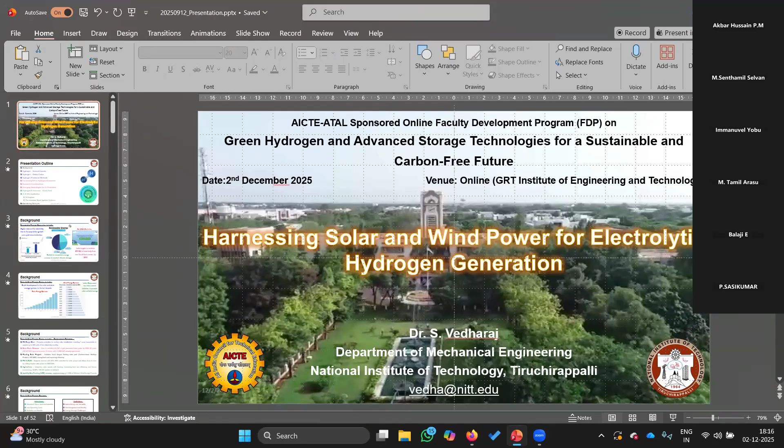So let me share the screen and I'll just start. So things are visible? Oh, yes, sir. Visible, sir. Fine. Shall I start now? Yes, sir. Please continue, sir. And if there is any technical glitch or you're not able to see the slide movement or audio issues, just let me know. Okay, sir. Right. Thanks. So good evening to one and all.

Today I've been given a topic on harnessing solar and wind power for electrolytic hydrogen generation, for this wonderful online faculty development program on green hydrogen and advanced storage technologies for a sustainable carbon-free future. As sir has introduced, I've been an engine researcher for the past 15 years. For the last 5 or 6 years, I've started working on hydrogen fuels, so we are developing hydrogen combustion systems. And in the last 1 or 2 years, I'm also getting into hydrogen generation because the world is moving towards hydrogen technologies and the hydrogen economy.

So the basic outline of today's presentation. First we'll start with the background: what is the status of the renewable energy sector in India? I'll also walk you through the current facts and the government schemes that have been introduced to promote renewable energy, what the setbacks of renewable energy systems are, and how hydrogen can bridge those setbacks. Then we'll see the general aspects of hydrogen and the different color codes adopted for hydrogen systems.

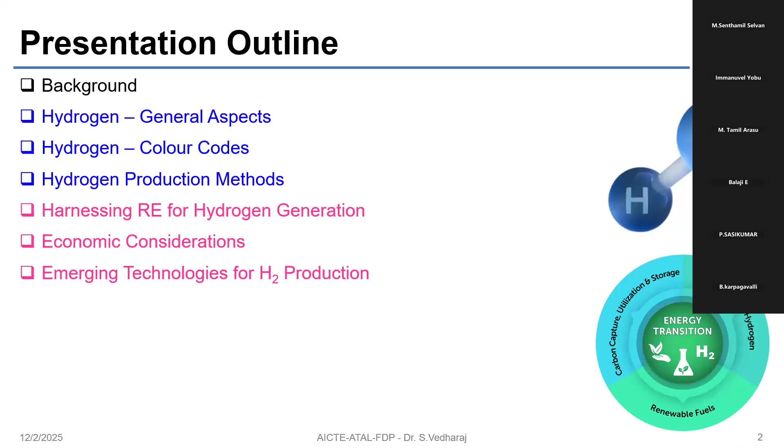So what are the emerging technologies that are in current research that will foster hydrogen production? That I'll also touch upon. And finally, how it is being used in end applications - hydrogen used in different ways.

As my expertise is with combustion, I will give you a brief about how hydrogen can be adopted for different engine concepts, and majorly herein I work with pre-chamber systems. So what do you mean by a pre-chamber system and how it can be incorporated - I'll give a brief about that, and finally the concluding remarks.

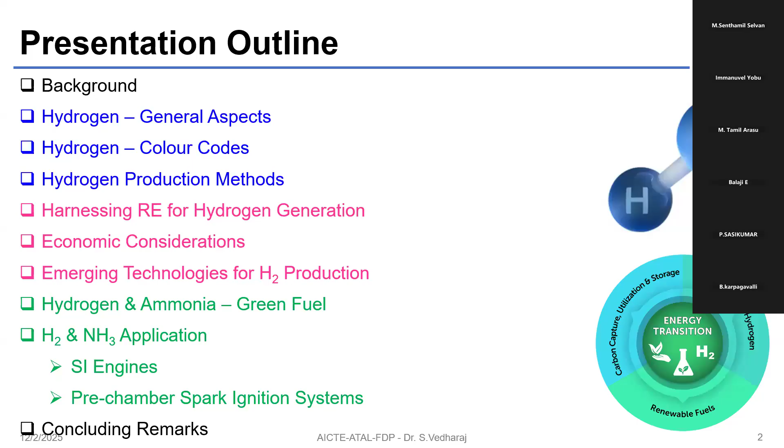In recent times, there is a rapid increase in electricity demand, majorly due to population growth as well as rapid industrialization. If we look into statistical data from the Ministry of Power over the last decade - in March 2014, the total electricity generation installed capacity was only about 250 gigawatts. Now it is almost doubled. Going forward there will be a huge demand due to industrialization and all the sophisticated instruments and other things we are procuring.

Everything relies on electricity, and the government is pushing away from conventional thermal power plants or coal power plant systems. What are the major things coming up in the renewable sector? The government is pushing towards renewable energy to combat climate change.

According to October 2024 statistics, we have crossed 200 gigawatts of renewable energy capacity in India. The government has made a clear promise to achieve 500 gigawatts of energy by the year 2030. If you look at the renewable energy capacity in India, the major contributors are solar, wind, and hydro, while biopower and small hydro are very small percentages.

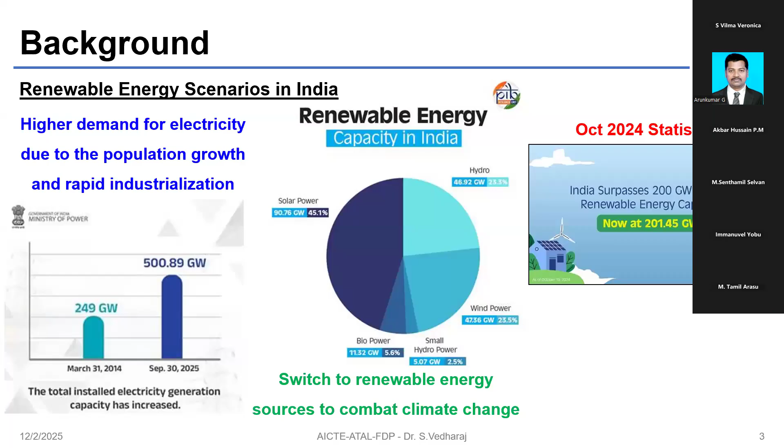Solar power contributes nearly 45% of the total renewable energy capacity, and wind is the second one, contributing nearly 23.5% of the total renewable energy capacity. So as I said, India targets 500 gigawatts of electricity exclusively from renewable energy by 2030 - that's the target they have set.

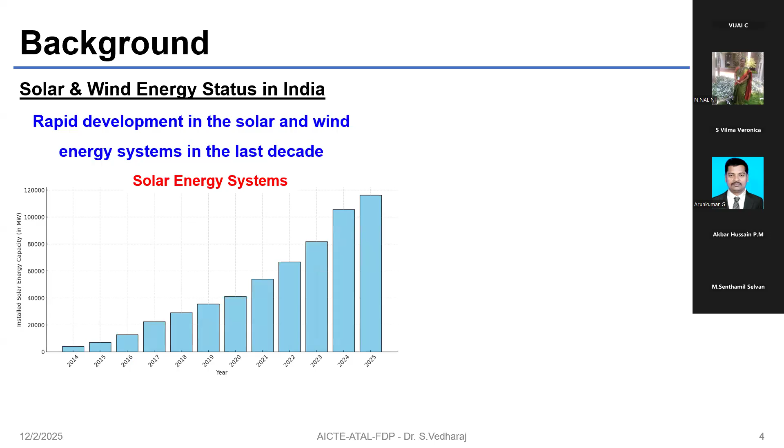If we individually look into the developments of solar and wind, the last decade shows drastic or rapid development in both sectors. In the year 2014, the total installed solar energy capacity was roughly less than 10 gigawatts. Now we are at about 110 gigawatts, which means it's kind of an 11-fold increase.

As India, we are geographically favorable for solar energy extraction - we lie in the Tropic of Cancer, and for about 300 days out of 365 days in the year we get solar energy. The government has taken initiatives to push solar energy systems to greater heights.

When it comes to wind energy systems, the capacity is slowly increasing. Compared to 2014 and 2024, the total wind energy system capacity has almost doubled. Similar to solar, we also have very large coastal lines, and because of this, wind energy accumulation is higher - a favorable situation for extracting renewable wind energy. Majorly, people focus on coastal regions near Tamil Nadu, or on Gujarat, where wind velocity or wind energy availability is higher.

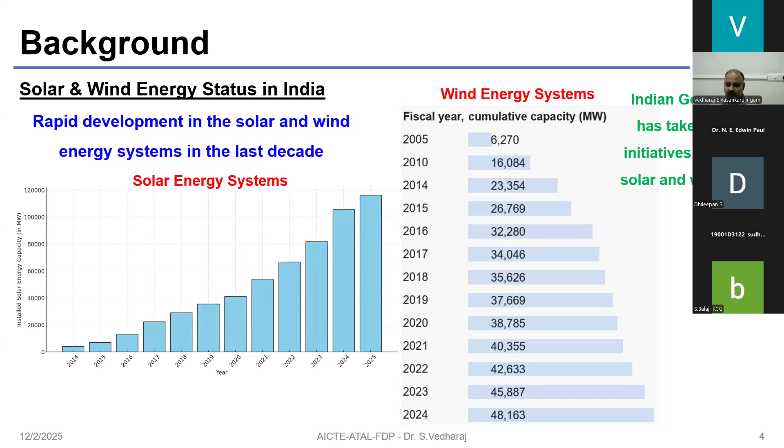In recent times, the government has taken several initiatives to promote both the solar and wind energy sectors. So I'll brief you about the different schemes that have been developed in recent times.

First is PM Surya Ghar - the Prime Minister introduced this in the year 2024 with a vision of enabling rooftop solar installation for nearly 1 crore households. It provides subsidy for installing solar installations, as well as 300 units of free electricity on a monthly basis. Within a year's time, I think they have achieved nearly 10 lakh installations, which has been in the news articles recently. This is a very huge step by the Indian government.

So they have planned to introduce the solar park scheme.

With the established capacity of nearly 40 gigawatts of solar energy by 2026, they have planned to go with 53 different parks across 13 different states, and currently nearly 14 gigawatts is already operational. Rajasthan's Bhadla solar park is the largest one, with a capacity of about 2.25 gigawatts in a single place, spread across a large area.

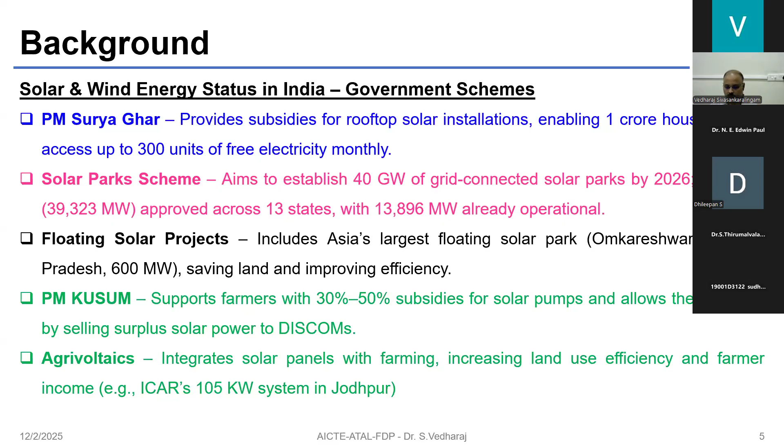The final one is a viability gap funding scheme. This is the only scheme introduced to promote offshore wind energy projects. We all know offshore wind energy is quite costlier compared to onshore wind energy projects, and the government wants to explore the capacity of wind available in offshore conditions. They plan for the implementation of 1 gigawatt of capacity: 500 megawatts is planned in Tamil Nadu coastal regions, and 500 megawatts of installation is planned in the shores of Gujarat as well.

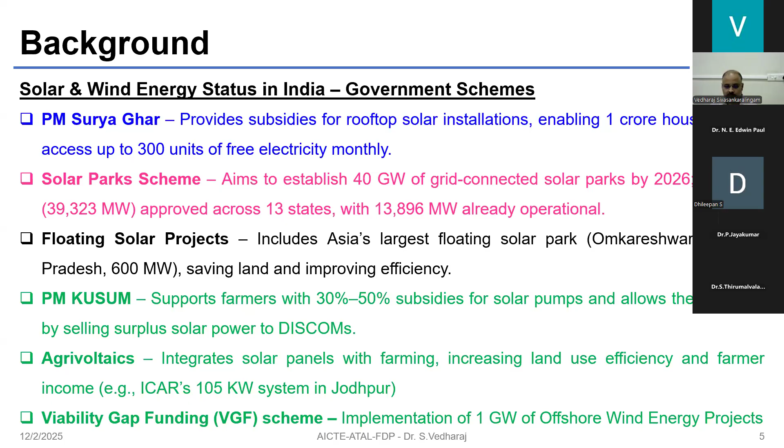We have been through this solar and wind energy system for quite a long time, and I want to summarize the key advantages and limitations of the systems, and how hydrogen can bridge these limitations. Solar and wind are abundantly available, inexhaustible, renewable, and clean energy. When it comes to operating cost, it is lower, because once you install these solar plants or wind farms, they have a lifespan of nearly 25 to 30 years, and maintenance cost is also quite low. That is one of the advantages.

The second thing is you can scale it to different levels - you can have very miniature systems as well as very large wind farms and solar systems, with rooftop installations as well as large parks. Nowadays with wind energy also, they have generated bladeless turbines and started installing them on highways to extract wind energy. So it is kind of flexible - you can go with either a small scale system or a large scale system.

We all know that the environmental impact it creates is very minimal - no air pollution, no water is being involved, so it's kind of advantageous. One major thing is it provides energy security. In 2022, when the Russia-Ukraine war started, Russia stopped its natural gas supply to European nations, and there was a huge demand for natural gas at that time. European nations felt the necessity of energy security by that time. From that period onward, every country is keen on developing energy security policy so they want to have their own energy resources, and India also is keen on these schemes.

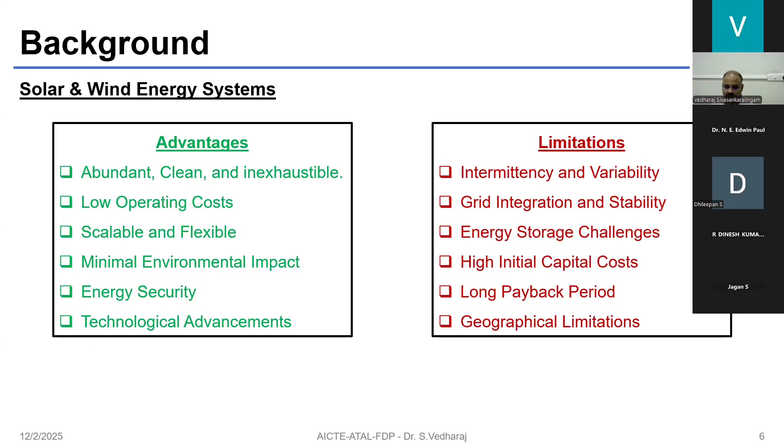So now how can these limitations of solar and wind energy be addressed with hydrogen technologies? One is the intermittent nature of solar and wind - instead of using a battery pack to store the produced energy, we can use that renewable energy to produce hydrogen whenever we have excess renewable energy. So during high solar or high wind output, and whenever generation is low, the hydrogen can be utilized in applications like fuel cells or other systems to provide back the energy. You store it during high production and give it back during low generation.

For energy storage limitations, you can store hydrogen as compressed gas, or you can liquefy hydrogen as well. It provides long-term energy storage solutions. Batteries have a limited capacity and are suited for short-term storage, but with hydrogen, you can go with long-term storage solutions as well.

For grid stability, hydrogen stores the energy during higher output and provides it back whenever generation is low. It just tries to smoothen out the fluctuations in renewable energy operations.

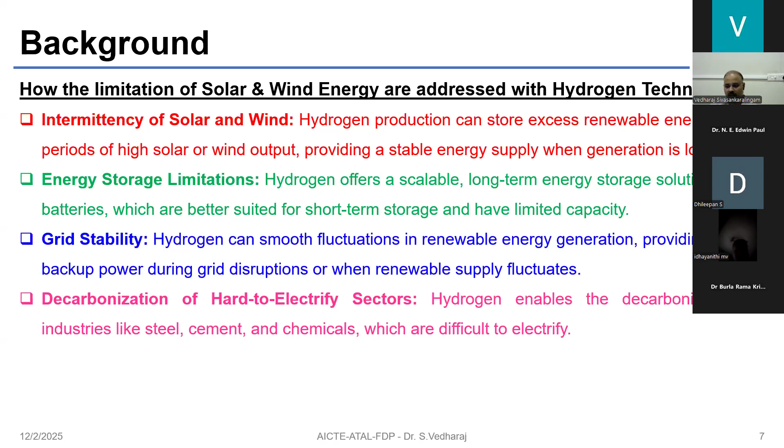When we go with concentrated solar power, we try to extract heat energy from the sun and target it towards a receiver, where you get higher temperatures, and allow a Rankine cycle to follow - using liquids to absorb the heat, which gets vaporized and expands in a turbine, and that turbine is linked to a generator to generate electricity. The electricity generated here is AC electricity.

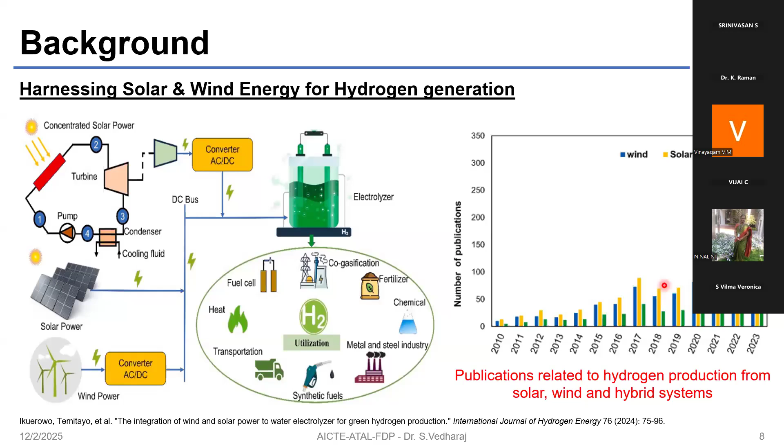And in recent times, you can see the number of publications on hydrogen production from solar, wind, or the hybrid system has increased a lot, right? So the statistics says that it follows an exponential trend; it denotes the people's interest towards having renewable energy for hydrogen generation.

So the general aspects of hydrogen. Hydrogen is the most abundant element in the universe; if you take the sun, you have majorly hydrogen and helium. But when we talk about Earth, it never exists in its molecular form of H2, right? Rather, it exists in compound form with other elements, like hydrocarbons or ammonia. Hydrogen as a pure one doesn't exist on Earth.

And it's an invisible, colorless, and odorless gas. It has the highest energy density on a mass basis, whereas on a volume basis it has the lowest energy density, right? And it has unique characteristics. It can be stored as a gas, compressed gas, as a liquid, or in certain applications as solid metal hydrides. So these unique characteristics make it ideal for energy carrier scenarios.

And nearly 95% of the hydrogen produced till date is majorly by the steam methane reforming process. The trend of electrolysis, due to the higher cost involved, is slowly taking up. But nearly 95% of the hydrogen produced is from the steam methane reforming process.

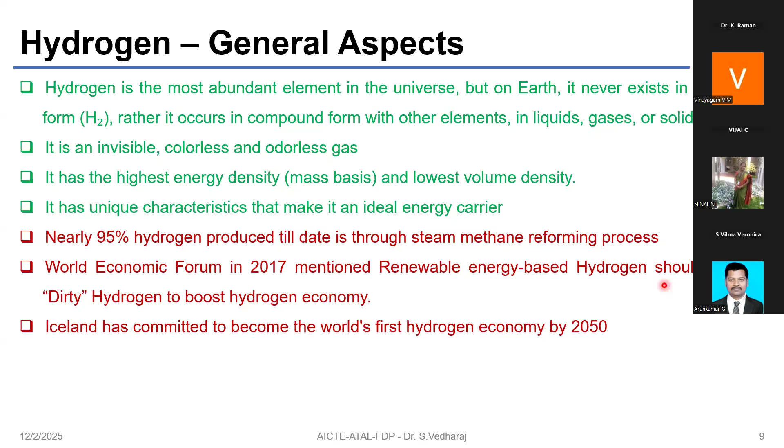And based upon that, Iceland has committed to become the world's first hydrogen economy by 2050. Hydrogen economy means it relies only on hydrogen for all its energy needs, right? The major reason is Iceland has higher geothermal energy, so dissociating water and producing hydrogen from the geothermal source is quite feasible. That's why they went with this treaty.

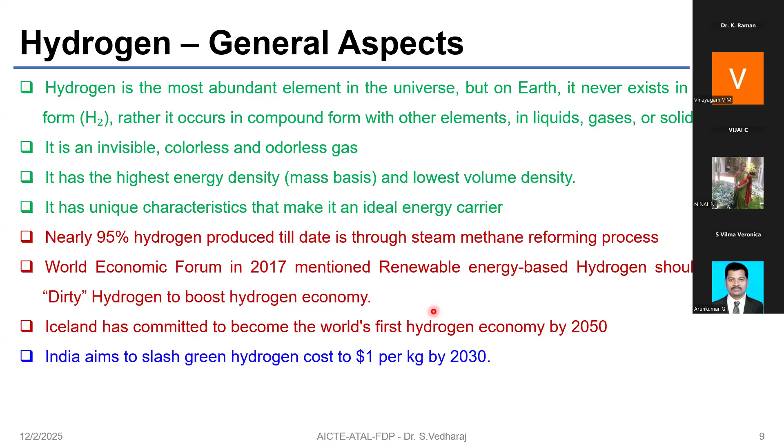And in India, the cost of hydrogen production is currently roughly around $3 to $4 per kg, and they want to slash it down to $1 per kg by 2030. India started the green hydrogen mission, wherein the government has set an ambitious target of nearly 5 million metric tons of green hydrogen production by 2030. It's a huge target, and many companies have started working towards that, and we'll see the scenario of hydrogen production in India as well.

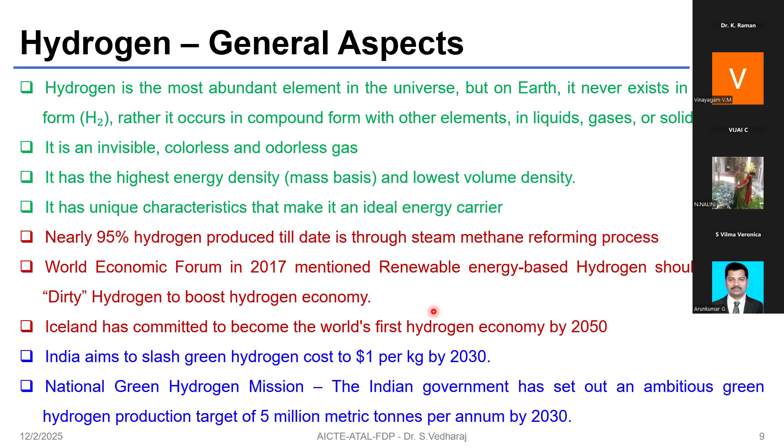I think most of you have heard about the different color codes of hydrogen, right? The traditional processes we classify as gray, black, and brown. Gray is when we use the well-known steam methane reforming process and don't capture any emissions. Black hydrogen uses coal gasification with anthracite coal. If you use lignite or brown coal, it's called brown hydrogen. These are the traditional methods for producing hydrogen.

And now people have come up with different colors, right? Blue hydrogen is the same steam methane reforming process, with one difference: you capture the carbon emission coming out of the process and sequester it and use it for different applications. Whenever you capture the emissions and store them for different usage, it is called blue hydrogen.

Then turquoise hydrogen is dissociating the methane molecule into hydrogen and solid carbon, so that nothing is left out into the atmosphere as gases. So you can use the solid carbon for different processes.

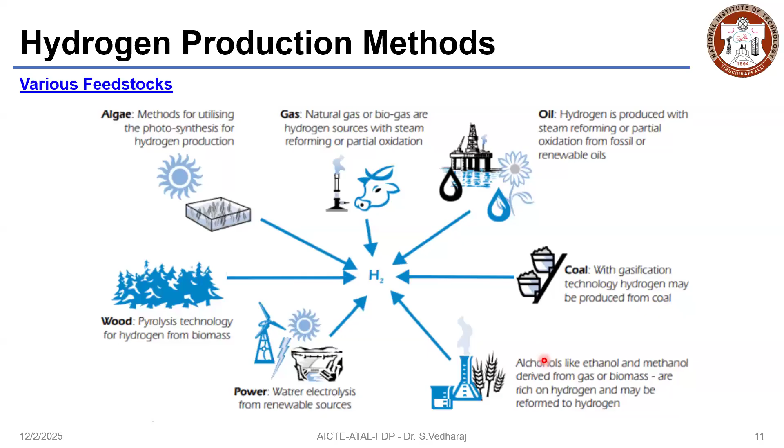They categorize the processes into electrochemical, thermochemical, and photochemical processes. So we have different resources. In the electrochemical electrolysis process, we use water as a feedstock, take electricity from either non-renewable or renewable resources, and dissociate the water. In thermochemical processes, we provide thermal energy to dissociate it to form hydrogen, using natural gas, coal, liquid fuels, biomass, carbonaceous material, and so on.

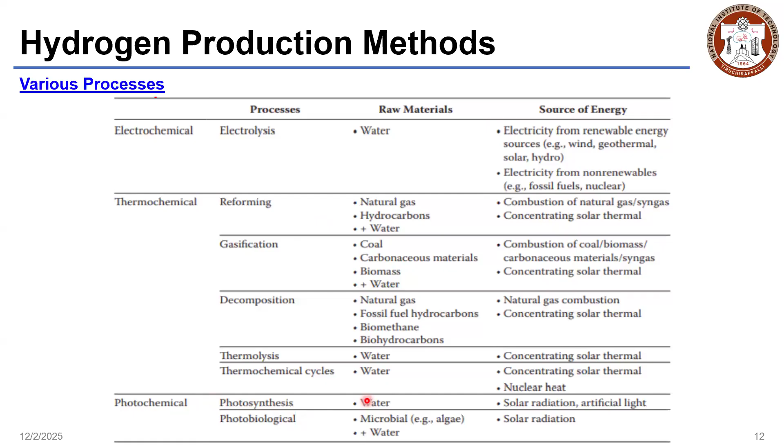Photochemical uses photo radiation, solar radiation, and the light source may excite the electrons and dissociate the water as well. So when we talk about green hydrogen, water splitting is one of the major things. You have three different scenarios: thermolysis, photolysis, and electrolysis. Thermolysis, as I said, you heat it up to very high temperatures and break it down to simpler compounds.

Water thermolysis usually happens at a temperature of more than 2500 degrees centigrade. You can also go for hydrocarbon thermolysis, kind of methane cracking, wherein we produce turquoise hydrogen, at roughly 1000 to 1200 degrees centigrade. In photolysis, the photons from the sun's energy are used to split the water. You have two scenarios: photochemical or photoelectrochemical. You can adopt both to dissociate the water.

And the main thing is electrolysis. We use electric current to split the water into hydrogen and oxygen. There are four different types, and the alkaline water electrolyzer is the most well-known one. Proton exchange membrane is also a known technology wherein we can generate hydrogen with higher purity.

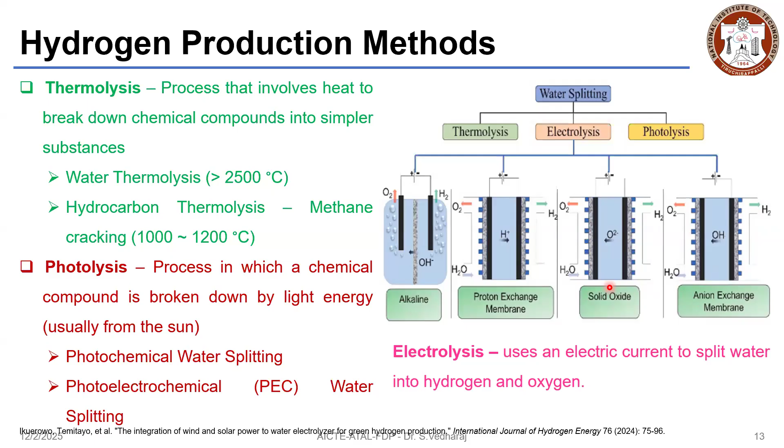Solid oxide electrolyzers as well as anion exchange membrane electrolyzers are evolving technologies, right? For solid oxide, in recent times there are a number of scenarios where they try to use steam instead of water to electrolyze it to form hydrogen. We'll see the working of each in the coming slides. So first is alkaline water electrolyzers.

It uses a concentrated alkaline electrolyte, either potassium hydroxide or sodium hydroxide, roughly about 5 M in the water, roughly 30 or 40% of the solution. The anode and cathode are separated by a diaphragm. The diaphragm allows the OH hydroxyl ions to flow, whereas it prevents the gases generated at the anode and cathode from mixing.

Whenever DC electricity is applied to this electrolyzer, at the cathode water reacts to produce hydrogen gas, and it also produces hydroxyl ions. These hydroxyl ions are transported through the diaphragm and reach the anode. At the anode, the OH ions liberate their excess electrons and produce water and oxygen gas.

So this technology is mature and it's a low cost hydrogen generation technology, and it has a longer lifetime. And the catalyst that is being employed in this alkaline water electrolyzer is non-precious metals. The major problem with this alkaline water electrolyzer is its slow response time. And because of its slow response time, it is not ideal for the fluctuating nature of renewable power.

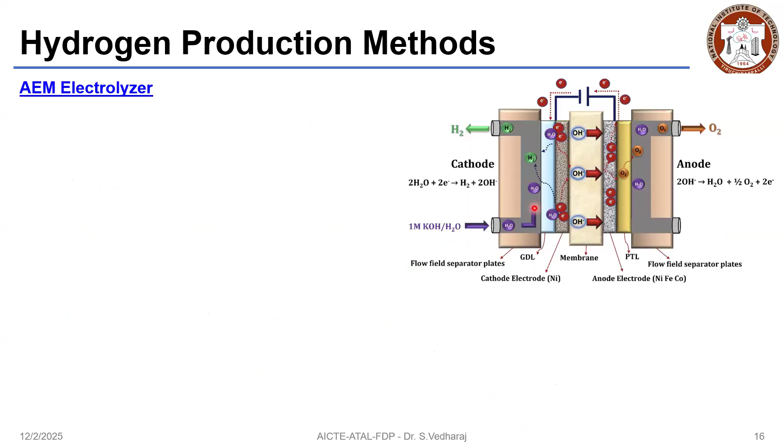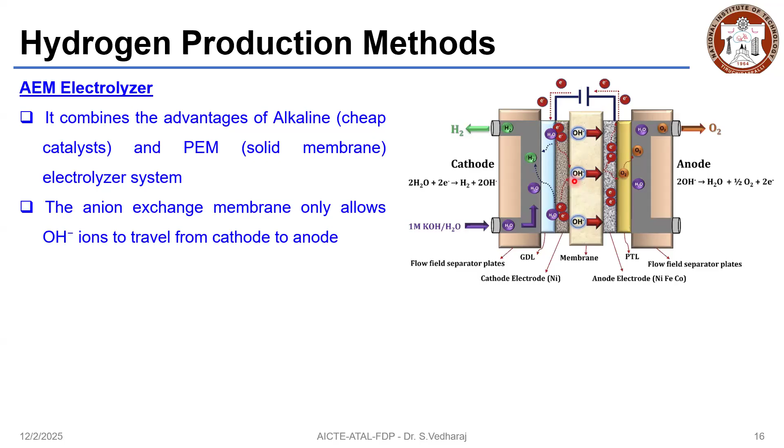So next is the anion exchange membrane electrolyzer. It combines the advantages of both the alkaline, that is the cheap catalyst, with the proton exchange membrane electrolyzer systems. And here the anion exchange membrane that we use between the cathode and anode allows only the OH ions to be transported from the cathode to anode, and it doesn't allow the gases that are formed to flow through as well, similar to the others, right?

And here the water is reduced to hydrogen in the cathode, and it produces hydroxyl ions. The hydroxyl ions flow through the membrane to the anode. And in the anode, the hydroxyl ions undergo oxidation to generate free electrons as well as oxygen. And here we can use low cost materials like the AWE, alkaline water electrolyzers, and thus it can be cheaper than proton exchange membrane.

And here also we use electrolytes. Unlike the alkaline water electrolyzer, here we use only low electrolyte concentration, for example, 1 M of KOH in the water, so that the base doesn't create any kind of corrosion in the cell. And this technology is still under development, and people have tried using this anion exchange membrane electrolyzer for electrolyzing saline water as well. It's in research scenarios.

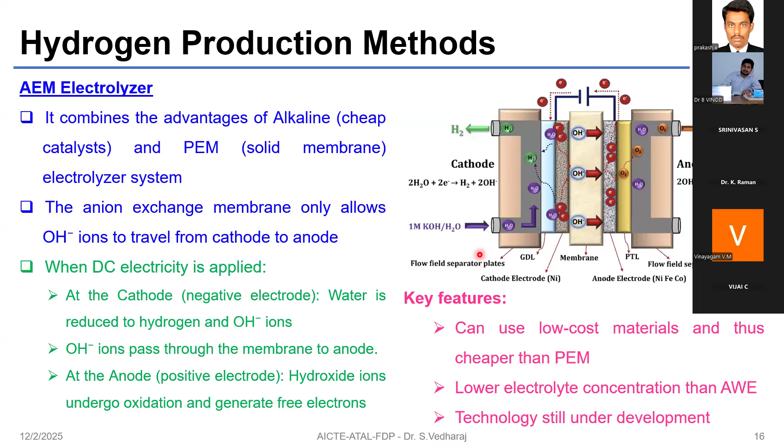And the final one is the solid oxide electrolyzer. As I mentioned, here people use only steam instead of water. It operates at a very high temperature, roughly about 700 to 900 degrees centigrade, and it splits the steam into hydrogen and oxygen. Whenever you apply DC electricity, at the cathode the steam gains electrons and splits into hydrogen and oxide ions. These oxide ions pass through a ceramic electrolyte layer towards the anode. And in the anode, the oxide ions release the electrons and form oxygen gas.

So it provides higher electrical efficiency because most of the energy comes as heat, and we try to maintain the temperature high. And we use expensive materials because the temperature involved is around 700 to 900 degrees centigrade, which means you have to provide durable materials, which are quite expensive.

Now, when we talk about the advancements in electrolyzer development, when it comes to alkaline water electrolyzers, research focuses on developing advanced catalysts for both the anode as well as the cathode to reduce the overpotential as well as enhance the reaction kinetics, so that it improves efficiency. Researchers are also exploring alternative catalyst materials that are abundantly available, cost effective and have lower environmental impact.

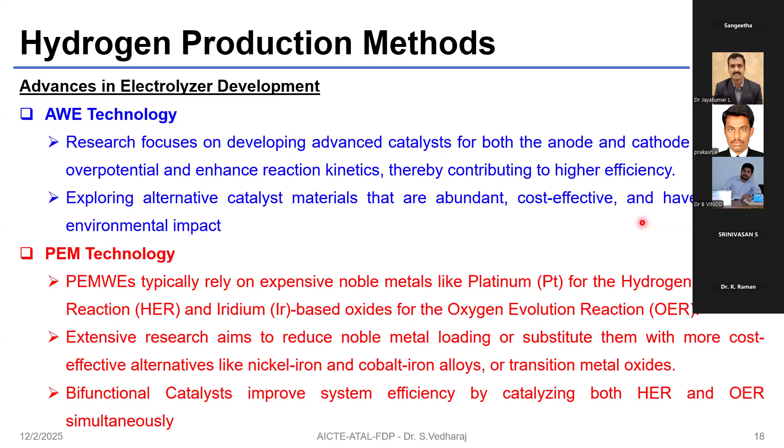When it comes to PEM technology, the PEM water electrolyzer majorly relies on expensive noble metals like platinum or iridium for the hydrogen evolution reaction and the oxygen evolution reaction. So extensive research has been carried out for the past two or three decades to reduce the noble metal loading and substitute with more cost-effective alternates like nickel or cobalt alloys, and transition metal oxides as well. And people have started working on bifunctional catalysts, which improve the system efficiency by catalyzing both the hydrogen evolution reaction as well as the oxygen evolution reaction.

And coming to the harnessing of renewable energy for hydrogen generation. As we discussed earlier, when we use concentrated solar power to generate heat, people use organic cycles to take the heat and expand it in a turbine, and the turbine is connected to a generator which generates the electricity required for the electrolyzer. We provide this electricity to the electrolyzer, and it can produce green hydrogen. So this is how it works with concentrated solar power or the solar tower that we intend to develop.

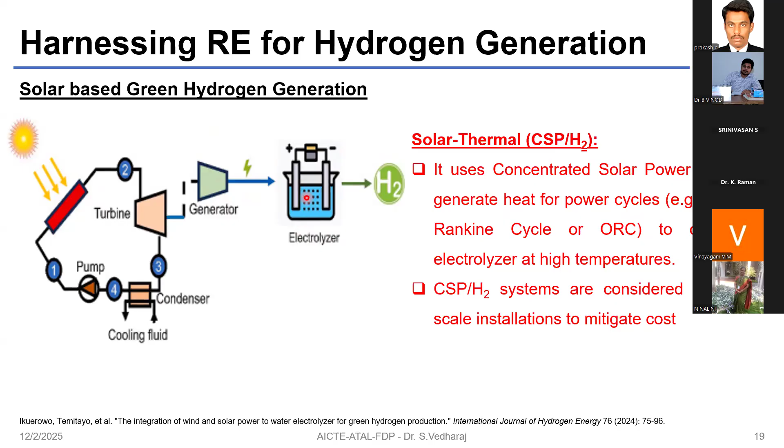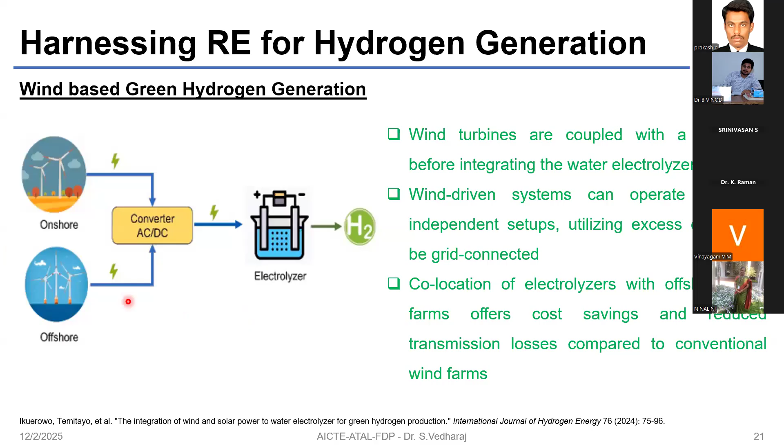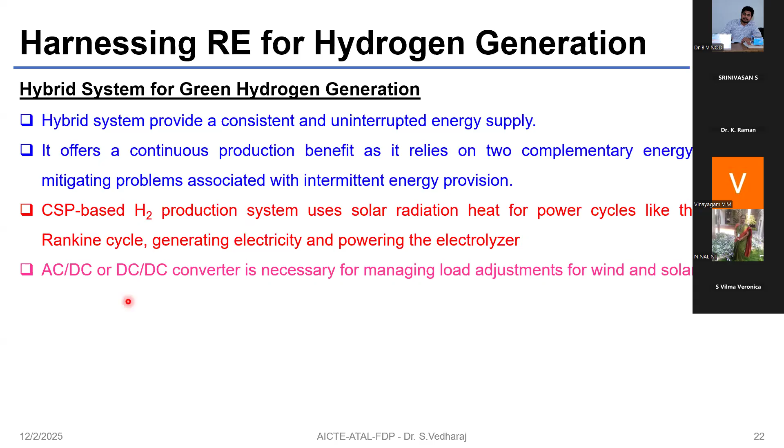And as I said, a CSP-based hydrogen production system uses the Rankine cycle to generate electricity, which can be used for other purposes as well as for the electrolyzer to produce green hydrogen. With wind and solar systems, we require either an AC to DC converter or a DC to DC converter for managing load adjustments. The integration of batteries ensures uninterrupted operation, because excess energy is stored in the batteries, and whenever generation goes down, you substitute that, which provides continuous hydrogen generation and enhances overall system efficiency. And hybrid systems can be categorized into on-grid as well as off-grid.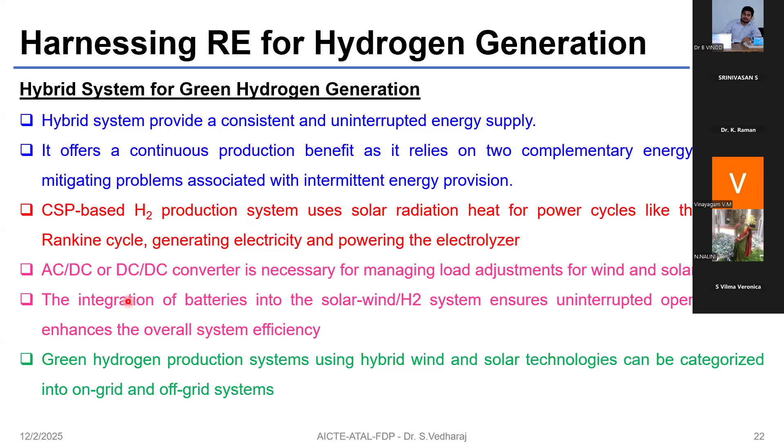So whatever you produce, you can give it to the grid, and you can utilize it whenever you have a lower production, or whatever is being produced, you utilize on your own. So the first one is about on-grid scenarios, wherein we have these wind, CSP, and solar PVs. So the energy that is being generated is used for charging your batteries, and it is also used for producing the hydrogen, green hydrogen, and the excess is being fed into your grid.

Because this is a DC bus, you need to have a DC-AC converter to supply to your grid. And whenever the production is less and you have utilized the batteries for green hydrogen generation and still you are lagging, then you can extract power from the grid, and you can use it for the green hydrogen generation. So that's with on-grid.

And off-grid is whatever we produce, we try to utilize that and store that in the battery and produce green hydrogen. So the major difference between these two is we decide what is the capacity of the hybrid system that we intend to develop, and what is the battery capacity that we need to have as a backup. So this has to be synchronized. If we have a grid, then whatever excess we produce can be given to the grid. But when you go with standalone systems, we need to ensure proper designing of all these scenarios.

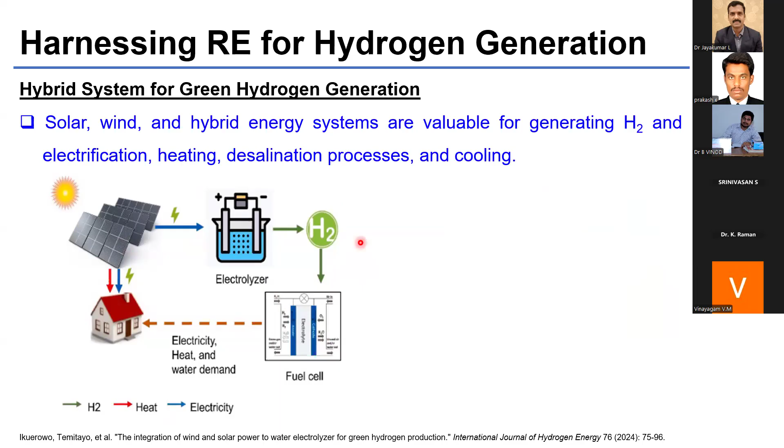So similarly, direct power from the solar will also be fed. In case you require more, that will also be fed through the produced green hydrogen. And this gives an overall picture of how green hydrogen produces the required electricity and feeds back to your systems. And the higher thermal energy generated with concentrated solar power can also be used for thermal applications, like thermal storage systems and thermoelectric cooling systems.

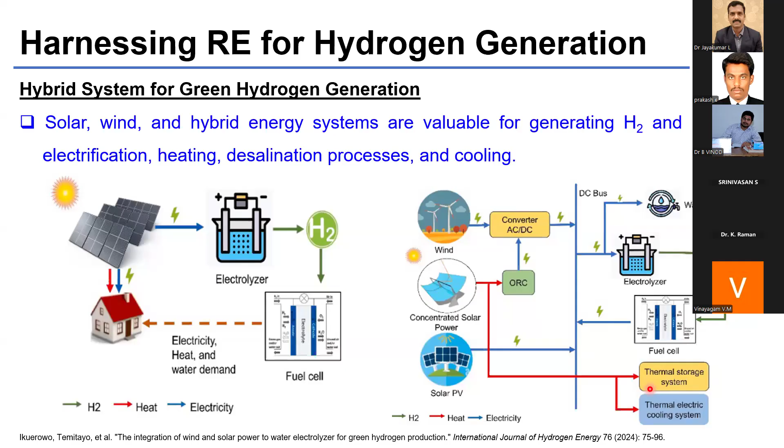So there are a number of different scenarios for how to incorporate these different kinds of hybrid systems for green hydrogen generation and also for other purposes. And I have just given a list of a few here. And recent projects, I categorize into three different scenarios: executed, under development, and approved. So executed, they have 100 megawatt solar PV for green hydrogen generation in Spain, and it generates green hydrogen at the rate of about 3,000 tons per year. In China, they have a plant which uses a 500 megawatt solar farm, and it produces green hydrogen at a rate of 3,000 tons per year.

And under development, you have the NEOM green hydrogen project in Saudi Arabia, which goes for a higher capacity of renewables. So roughly about 3.9 gigawatts of renewable energy they want to extract and utilize for producing hydrogen and ammonia. And Oman also has targeted 5 gigawatts of wind and solar capacity, and the green hydrogen target is about 200,000 tons per year.

And in India, we have two different projects that have been approved. One is the Dhirubhai Ambani Green Energy Giga Complex, where they have identified space in Jamnagar, and they want to produce nearly 3 million tons of green hydrogen. The Indian target is about 5 million by 2030, and this is one of the major contributors. And Acme Group has started their work with generation of green ammonia. About 213,000 tons of green ammonia they will generate in a year, and they have this plant in Tamil Nadu, Thoothukudi region.

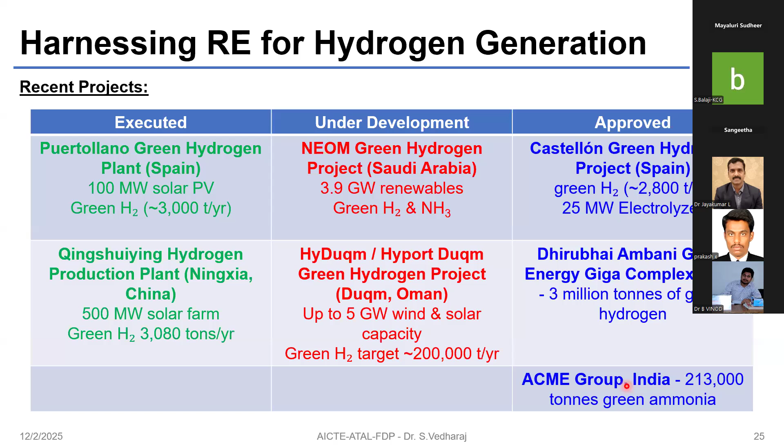So when we come to technologies, the price range is somewhere about $7.5 for alkaline water electrolyzers. For PEM, it is 5.3 to 9.3. And for solid oxide, it's 6 to 9.34. And considering these scenarios, when you go with higher production, obviously the cost involved will be reduced. So that's what India has planned, and it targets to achieve $1 per kg of hydrogen by 2030.

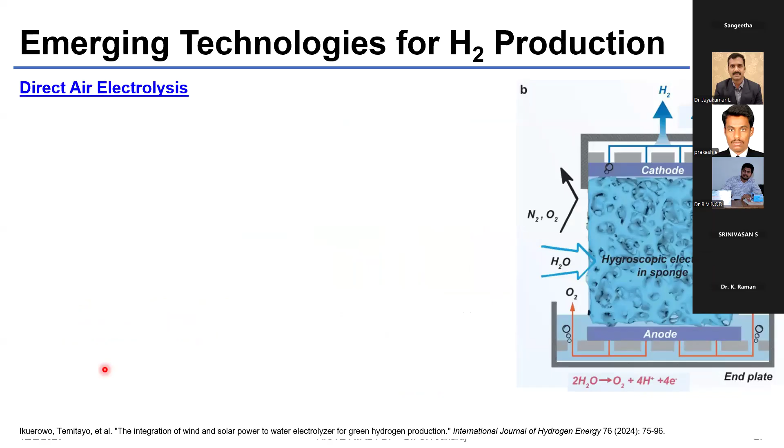So other emerging technologies for hydrogen production include direct air electrolysis. When we talk about electrolysis, we need fresh or desalinated water. In direct air electrolysis, you have a hygroscopic electrolyte, a sponge-like material, and you allow air to flow through it so the water vapor present in the ambient environment is absorbed by this hygroscopic material. The water is then transported to the electrodes, and it generates hydrogen. People have achieved this even with a low humidity level of 4%, extracting hydrogen production from it.

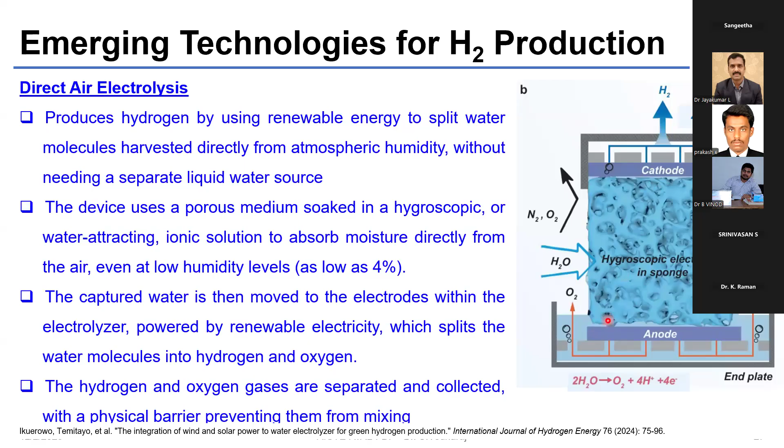This recently came up in a research article by an Australian university. So that's a major thing - you provide some physical barrier to remove the oxygen from the anode and hydrogen from the cathode.

Next is the membraneless electrolyzer. Whenever we talk about electrolyzers, the membrane is one of the costliest parts. It also deteriorates over time, and the lifetime is dependent on the membrane. So people came up with a membraneless electrolyzer device, wherein they separate the oxygen and hydrogen using fluid dynamics instead of a physical membrane. When we eliminate the membrane, the system becomes simpler and more cost effective compared to traditional electrolyzers.

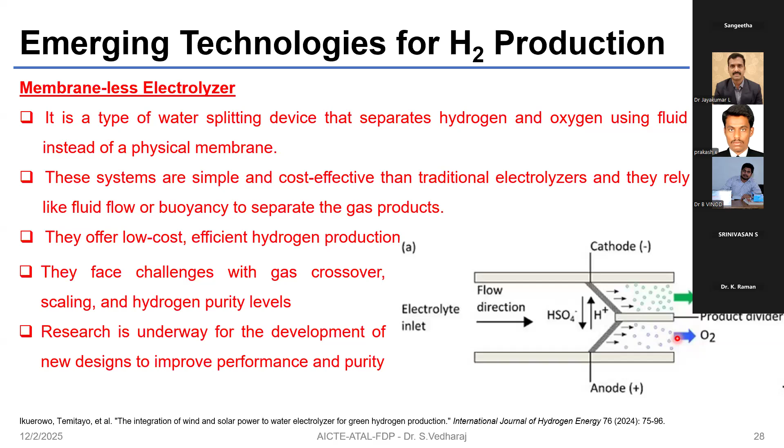The fluid separation majorly relies on fluid flow forces or buoyancy to separate the products. You have the electrolyte flowing in certain directions, with the cathode and anode positioned accordingly. When it gets in contact, it generates ions and produces hydrogen. At the outlet, there's some kind of product divider so both gases are divided and extracted separately. This offers a low-cost, efficient hydrogen production system, but it faces challenges with gas crossover, so 100% pure hydrogen can't be achieved with this scenario. Research is underway for new designs to improve performance and purity.

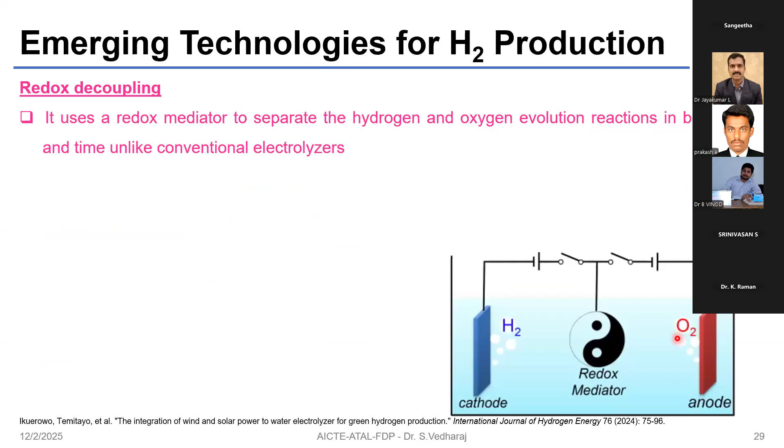The next approach is redox decoupling. Here they use a redox mediator to separate the oxygen and hydrogen evolution reactions in both space and time, unlike conventional electrolysis. The hydrogen evolution reaction takes place, splitting water into hydrogen gas, and the oxidized form of the redox mediator is formed whenever the hydrogen evolution reaction takes place.

When the oxygen evolution reaction occurs, it's planned separately - the oxidized redox mediator is reduced to produce oxygen gas. So you can keep accumulating the oxidized form of the redox mediator and use it in some other place - you can transport it and produce oxygen in other regions as well. Various redox mediators are being developed, including metal oxides, organic molecules, and vanadium-based compounds.

Finally, the electrified steam methane reforming process. As I said, steam methane reforming is quite well established, and nearly 95% of hydrogen produced comes from this process. The CO2 emissions come from the water gas shift reactions. For enabling the steam methane reforming process, it requires heat, at a temperature of about 700 to 900 degrees centigrade, and majorly this heat is provided by conventional combustion process.

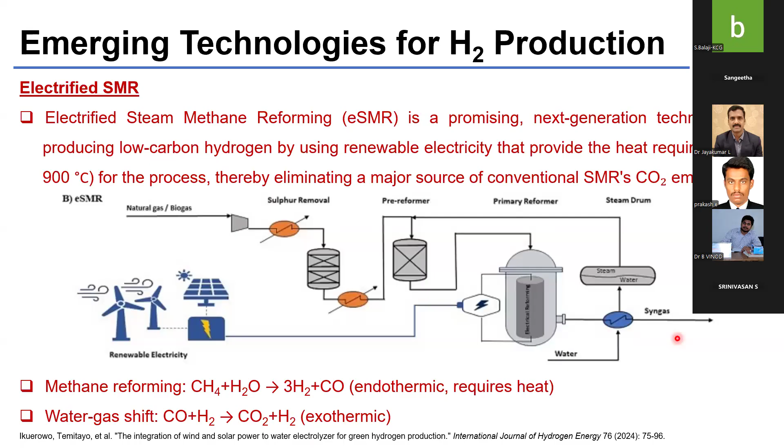So that's with the generation process. Next is the application-oriented things. I'll try to give a crux of these within the next 10 to 15 minutes.

We all know that hydrogen and ammonia are green fuels because they don't provide any carbon emissions, and the major emission from hydrogen combustion is only water vapor. If the temperature is too high, the air's oxygen and nitrogen combine to form nitrogen oxide emissions as well. So the fuel properties of both hydrogen and ammonia are favorable for engine operations, but hydrogen has a higher octane number, so it's majorly used in SI engines. It has wider flammability and lower ignition energy requirement, so it can operate in SI engines with stable combustion and better performance.

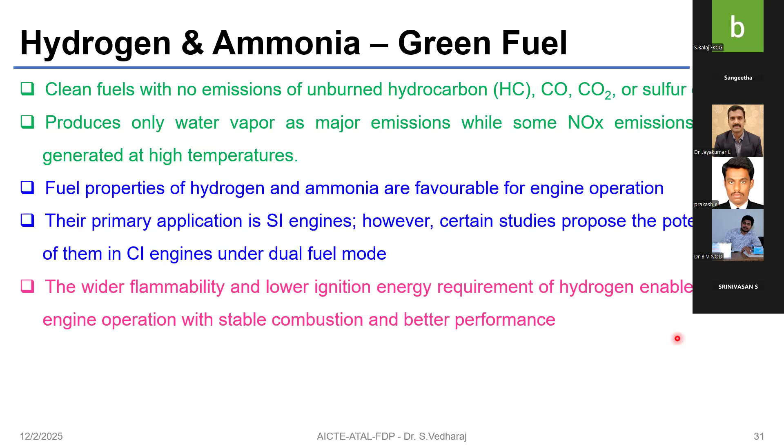But it requires some modification in the fuel storage and injection system because we are transiting from liquid fuel to gaseous fuel. We need some kind of control system to avoid backfiring as well.

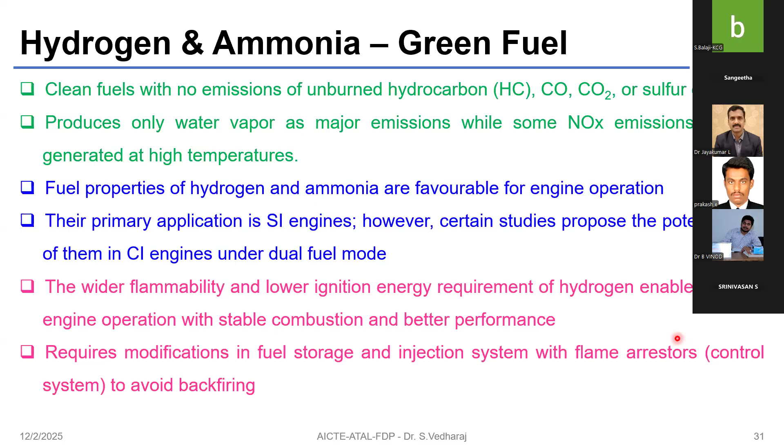The volumetric energy density is too low, which means you need to store hydrogen at very high pressure. Ashok Leyland and Cummins have come up with storage tank designs that can store hydrogen at a pressure of about 350 or 700 bar. So when you have a 700 bar hydrogen tank in a vehicle, it's equivalent to the gasoline or diesel fuel stored in that particular thing.

So the major challenges with hydrogen are its safe storage, transportation, and handling. It also, when exposed to metal, will embrittle the metal.

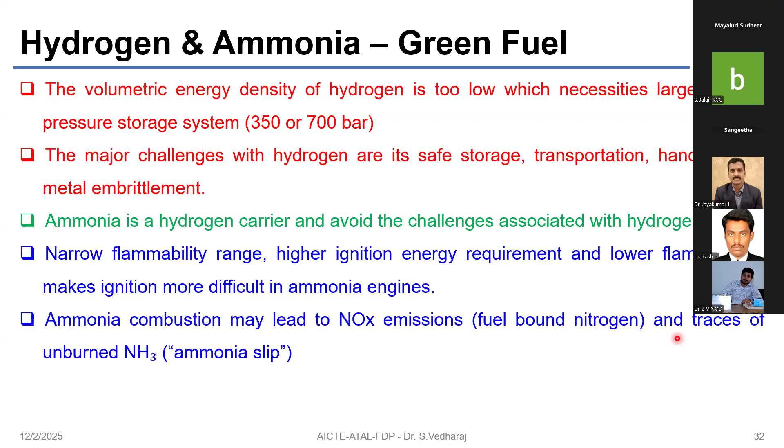Ammonia is considered as a hydrogen carrier, and it avoids the challenges associated with hydrogen. But ammonia, in contradiction to hydrogen, has a narrow flammability range, higher ignition energy requirement, and lower flame speed, which makes it difficult for ammonia engines. Ammonia has fuel-bound nitrogen as well, so nitrogen oxide formation will be higher. Also, ammonia is toxic, so whenever you emit it to the environment, it's also a major drawback.

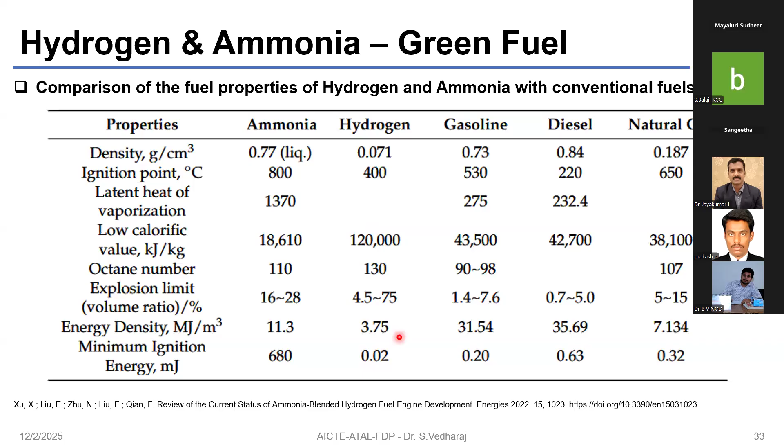The property comparison of gasoline with hydrogen and ammonia: if you could see the energy density, compared to gasoline, the energy density of hydrogen on a mass basis is almost 3 times higher. But on a volumetric basis, it's almost one-tenth of gasoline, so that's one of the major drawbacks with hydrogen.

I'll just skip a few things. When we talk about the fundamental characterization of these fuels, we intend to estimate the adiabatic flame temperatures, autoignition delay, and laminar flame speed.

Hydrogen is highly reactive, so the delay in ignition is very small for hydrogen, whereas ammonia is a lazy or sluggish fuel, so its ignition delay is higher. When it comes to flame speed, hydrogen has a higher flame speed and ammonia is very slow. Adiabatic temperature is also higher for hydrogen and lower for ammonia, and the same with extinction strain rate - how the flame expands and extinguishes as it approaches the wall - that is also higher for hydrogen and lower for ammonia.

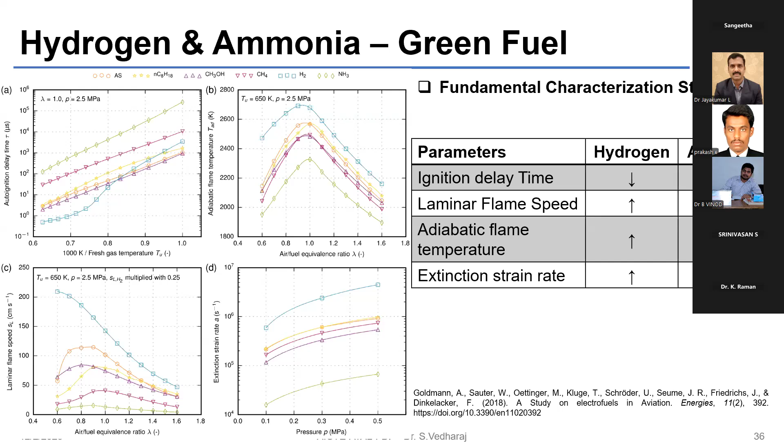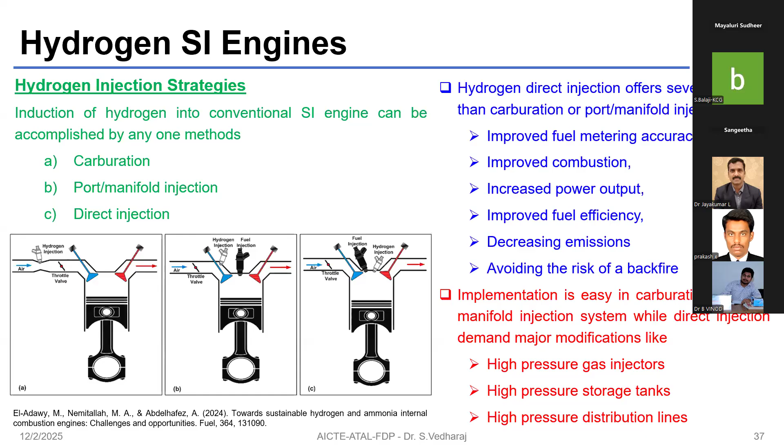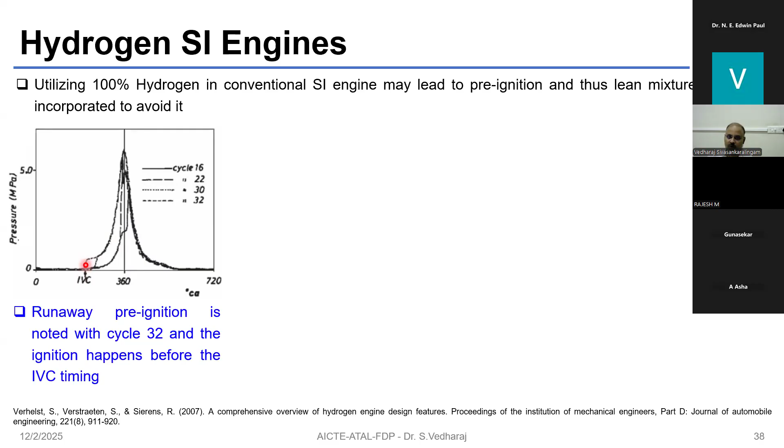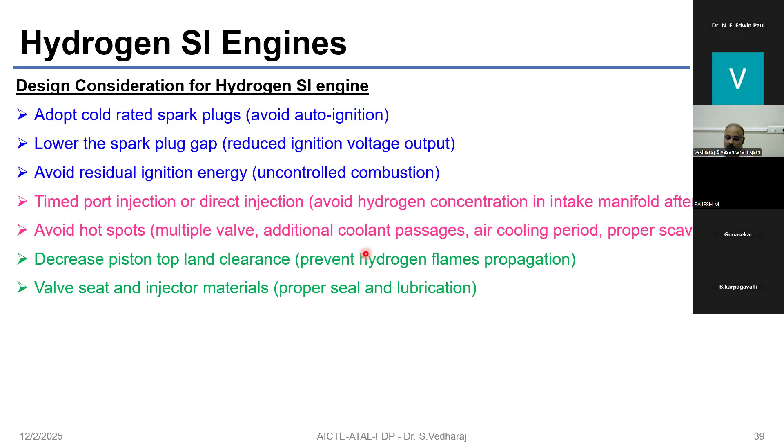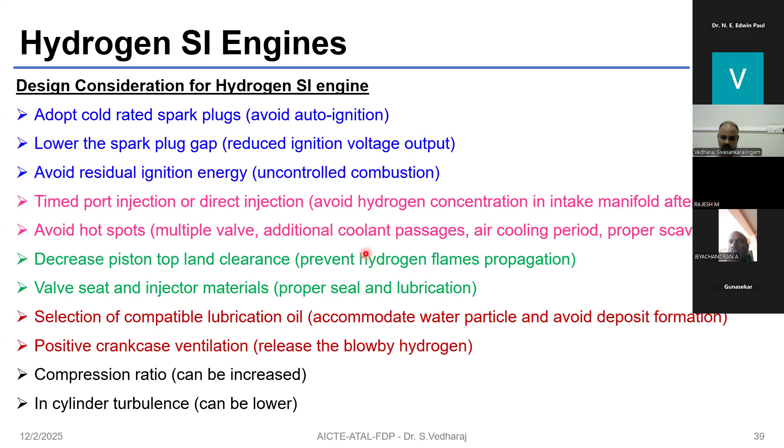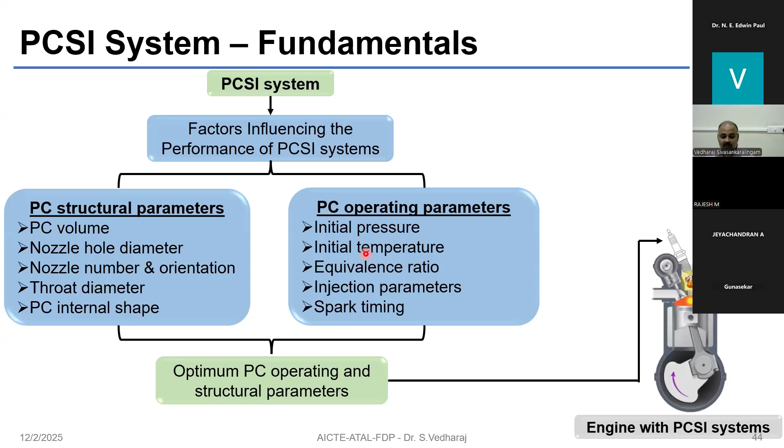These are some of my works on advanced combustion systems, wherein we use pre-chamber ignition systems. We have a small pre-chamber like this, and we try to ignite the mixture here, and the flame travels into the engine, so that you can go for lower lean mixtures and also achieve stable combustion.

Whenever you go with lean mixtures of hydrogen, you reduce the NOx and other emissions, but the major problem is with ignition. So if you adopt these techniques, you can achieve better combustion stability with lean mode of operation of hydrogen engines as well. So we are working on these things.

Majorly, I work with combustion systems. In recent times, I have started using hydrogen technologies like turquoise hydrogen generation, wherein we decompose methane to solid carbon and hydrogen generation, which is of quite interest in recent times. So I started my research in these areas as well.

Towards the final conclusion, I want to mention that the future is towards hydrogen energy for all major energy sectors. Looking towards the future, it's not only solar or wind that is to be utilized for generating hydrogen - it will also be all the renewable energies that will be majorly used to generate hydrogen.

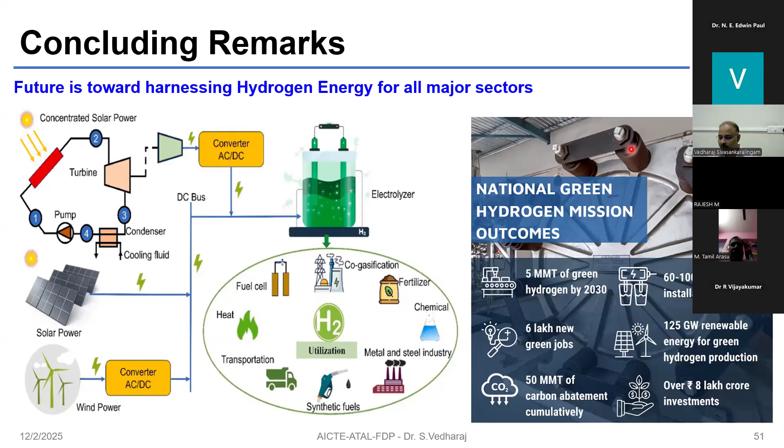So with that, I just wrap up my presentation. We'll just open for a few queries, if any.

Good evening, sir. This is Lakshmi Narasimhan. I am the Vice President of GRT Group of Institutions. First of all, thanks a lot for your excellent presentation and opening of the opportunities for hydrogen for the future. Actually, I have two questions. May I pose the first question?

Yes. How about using hydrogen in hybrid electric vehicles? How do we go about it, for example, coupling fuel cells with the conventionals? As an expert, how do you foresee combining hydrogen as a fuel cell together with hydrogen-based ignition systems?

The thing is, looking towards the automobile sector, hybrid vehicles are the future, right? In the next few years, whatever vehicles come up will be with hybrid systems. And when we talk about hybrid systems, you need a range extender. Either it goes with internal combustion engines powered by renewable fuels, either low carbon or zero carbon fuels, or fuel cells. And it's an evolving technology.

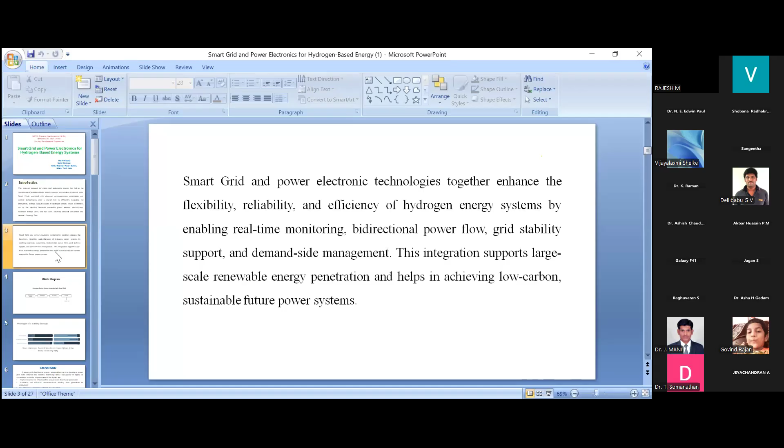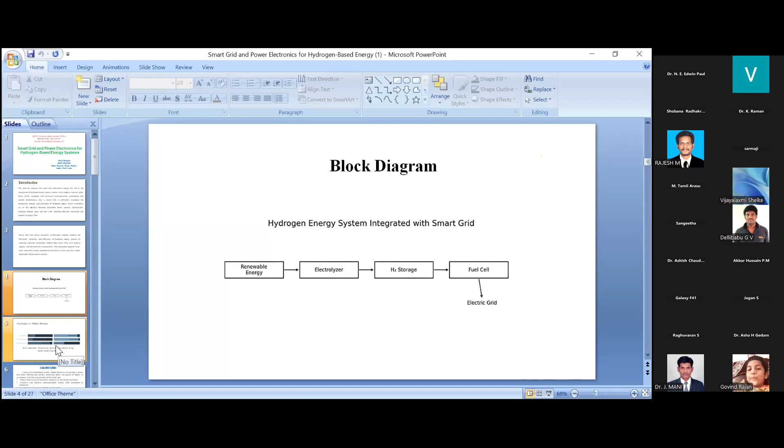And coming to our point, that is smart grid. A smart grid is the distribution system that makes a power grid more efficient and reliable, improving safety and quality of supply in accordance with the requirements of the digital age. Even now we are using grid technology, with so many updates in smart grid technologies. Before, we had grids only in the southern, northern, western and eastern regions.

Now it is a centralized grid, where power generated in Orissa or Uttar Pradesh can be used in Tamil Nadu or Kerala, because the smart grid can combine all the generating stations under one umbrella, supplying power throughout India.

And I think something is happening. Okay, with requirements. Wait, ma'am, few minutes. Ma'am, you continue, ma'am. I will make arrangement. Okay, sure. No issue, sir. I can change the slide.

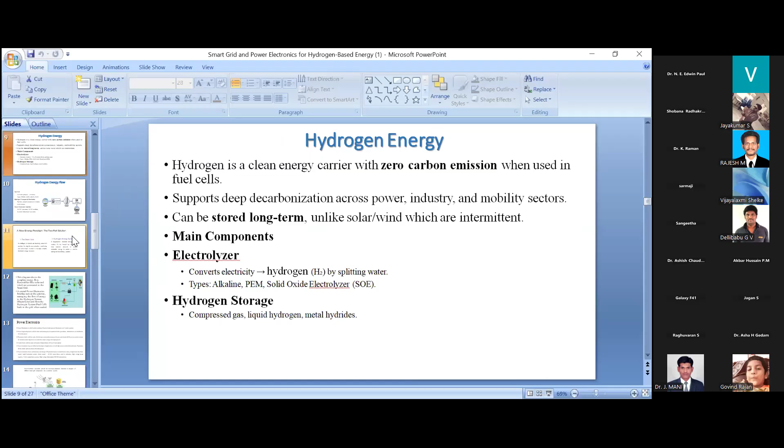Hydrogen storage techniques are compressed gas, liquid hydrogen, or metal hydrides. Actually, here we have a separate hydrogen gas making plant for our generator cooling also. For information, I'm saying hydrogen is not easy to handle.

But we need more SOPs to handle that hydrogen, and the government of India is working on how to protect and how to handle the hydrogen safely, and how to transport it and everything.

Actually, the mission of our Indian government is to generate 5 million metric tons by 2030, and by 2070 we need to go completely to zero carbon fuel. Replacement of fossil fuels and a self-reliant economy is the motto of our Indian government. By 2070 we shall be using green hydrogen energy only. This is all the information I have received.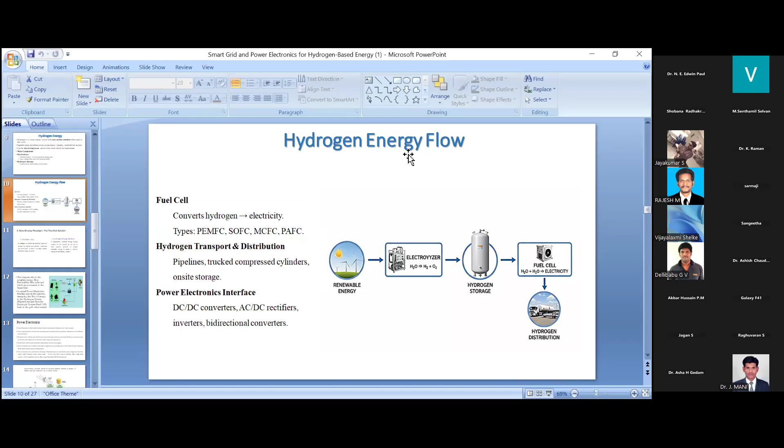And the power electronic interface here is DC-DC converters, AC-DC converters, inverters, and bidirectional converters. As I already told, bidirectional converters play an important role. So this is a power diagram that is a two-part solution. When these two things combine together, we can achieve many good things for our sustainable life. The smart grid.

The smart grid is an intelligent bidirectional electricity network. It provides the digital communication, monitoring, and control layer needed to manage complex distributed energy resources. The smart grid is nothing but, just imagine, our mobile phone. How the mobile phone makes our life that much easier, like that.

And here the hydrogen-based energy system is a longer duration chemical energy storage medium; we can use it to store massive amounts of surplus renewable energy for weeks and months, solving intermittency problems. Once the plant gets tripped, we need to bring back the power plant. For our plant we have two startups, one is hot startup and the other is cold startup. In hot startup we can bring back the power plant within 8 to 9 hours.

In the meantime, we can either purchase from private parties or from renewable sources. Instead, if we stored our energy in the form of hydrogen, we can use our own energy, so the financial benefits are more. That is storing surplus renewable energy for weeks and months, solving the intermittency problem. For a cold startup, it takes nearly 36 hours to bring the 600 megawatt to grid. That's why the stored energy can give a backup source to the grid.

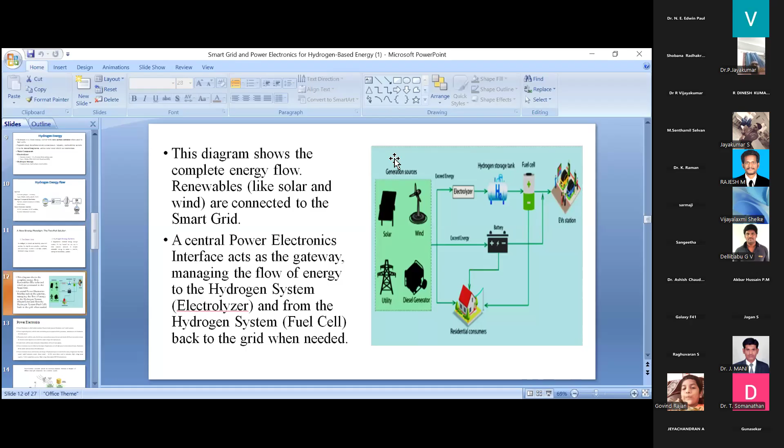And here I'm showing, for example, here it is an EV station. So these are whenever, wherever required; that is the main motto in the smart grid. The central power electronic interface acts as a gateway, managing the flow of energy to the hydrogen system and from the hydrogen system back to the grid when needed. So using excess power in the grid, we can generate and store hydrogen. Whenever the power is required, we can release hydrogen as electricity. This is called two-way energy.

And here, coming to the point, it is power electronics. Actually, power electronics plays a key role. Even if we are generating all the things, without the electronics and the modules and everything, we can't generate electricity, we can't store, we can't transport and transmit everything. So power electronics is the field which combines electric power, electronics and control systems. Power engineering deals with static and rotating power equipment for the generation, transmission and distribution of electric power.

Yes, exactly, power engineering deals with that. That's why in NTPC and some of the central government organizations, everybody named us power engineers, not mechanical engineers or civil or electrical engineers. They are naming us power engineers only.

And electronics deals with all the semiconductor power devices and power conversion to meet the desired control objectives. And control deals with the static and dynamic characteristics of closed loop systems. And power electronics may be defined as the subject of application of solid state power semiconductor devices. Thyristors play a major role, and IGBT based rectifiers also play a major role in this smart grid technology. And you all may know very well about thyristors and all the terms.

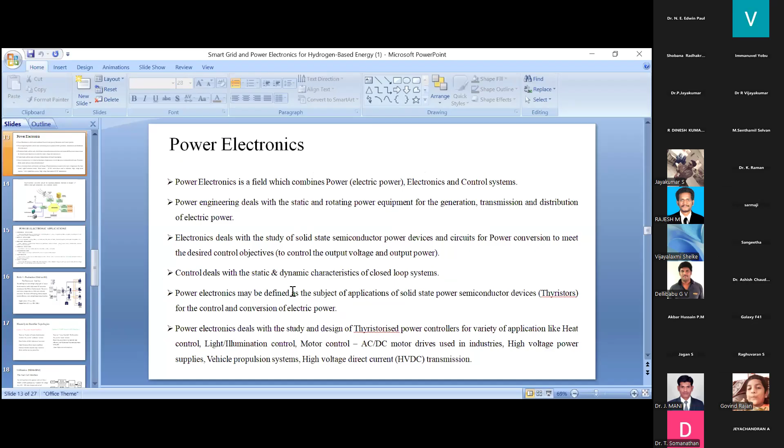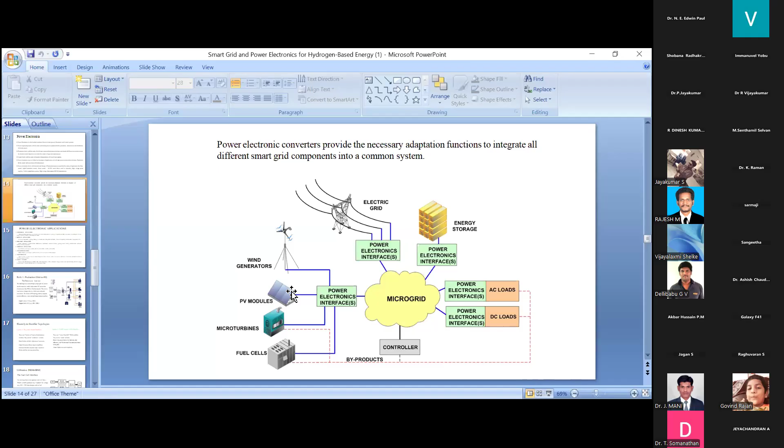So here is a simple integrated technique of how the small microgrid technology works. We have wind generators, PV modules, micro turbines, fuel cells, and here the power electronic interface connection, and here the power electronic interface from the grid. The microgrid stores the fuel cells and releases the power when and wherever required, and the interfaces and everything come under this.

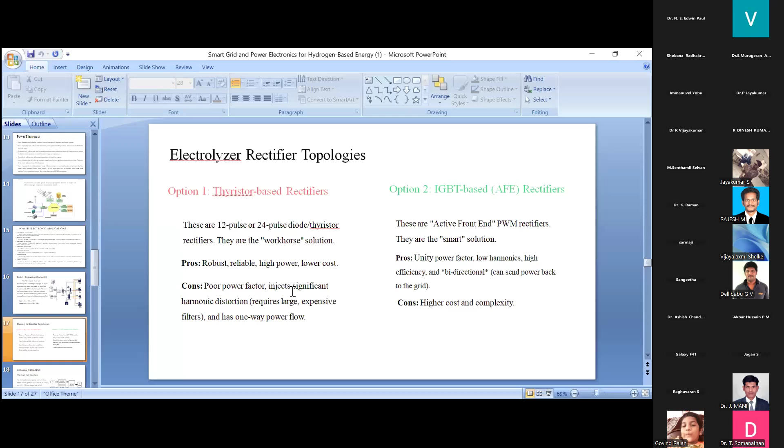We can use this thyristor based technology in the smart grid to maintain voltage stability and avoid voltage fluctuation. And it is low cost. The cons are poor power factor, it injects significant harmonic distortion, and has one-way power flow only. But the IGBT technique, the active front end, that is PWM rectifiers, is the smart solution: unity power factor, low harmonics, higher efficiency, and it is bi-directional. We can send power to the grid and we can take power from the grid also. But this is at a higher cost.

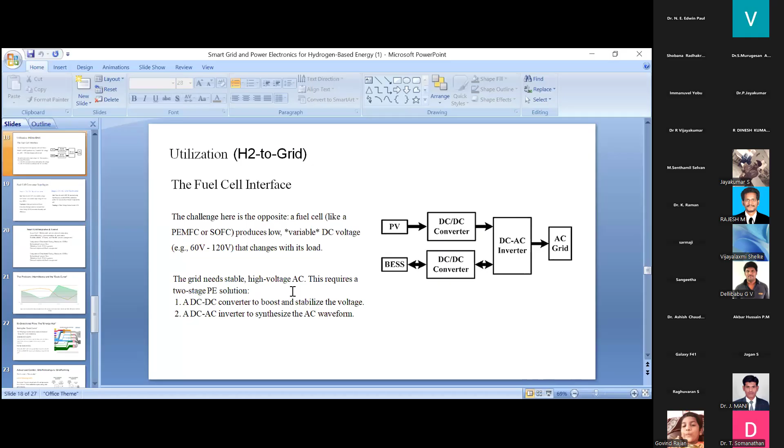H2 to grid, that is hydrogen to grid, is the fuel cell interface. Here is how the hydrogen storage tank interfaces to the grid. The challenge here is the opposite. A fuel cell produces low, variable DC voltage that changes with the load. The grid needs a converter, and this DC-AC converter then feeds the AC grid. So H2 to grid is for utilization. So here we have a DC-DC boost converter and a DC-AC grid tied inverter.

The DC-DC boost converter creates safe and efficient high voltage buses that can be handled, and for DC-AC we can use IGBT switches and three-phase to exactly sync with the grid. The DC-AC grid tied inverter is the good one to do this. And here I give some of the techniques and controls for how to handle that.

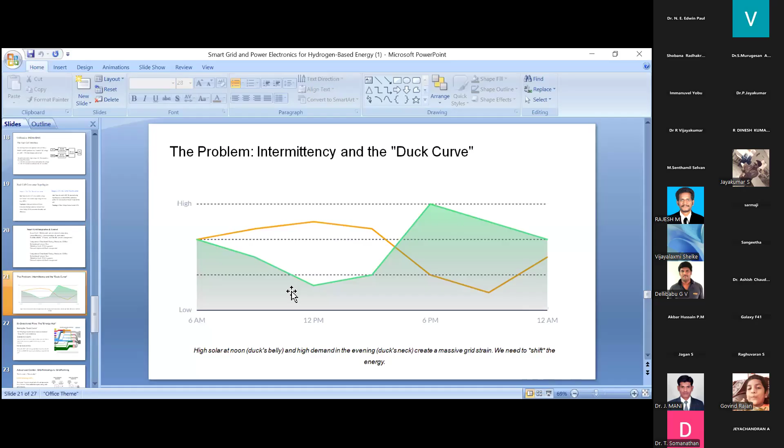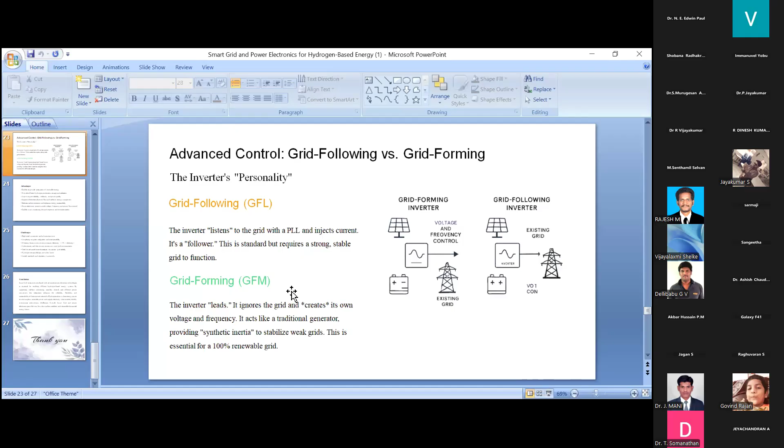The main thing is cost optimization. To generate 1 unit of electricity from a thermal station, based on the performance of the thermal station, it may vary from 5 rupees to 10 rupees. But for domestic purpose, government is giving up to 100 units free of cost, and after that they are charging. But here the generation cost is too high.

If we use the available renewable sources, and if we store all the energy from here, then the cost optimization technique plays a key role. What is that? Storing of hydrogen, using hydrogen in the smart grid technology by using power grids and power electronics.

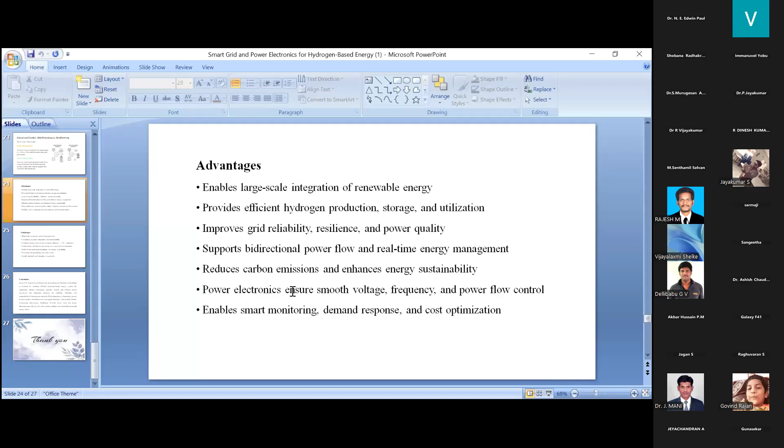So why I'm repeatedly saying cost optimization is important - maintaining the equipment in the power stations is so high, and the daily maintenance cost is also high. It's directly implemented in the generation cost, that is called fixed cost and variable cost. Even the coal transportation from various sites, from rails to plant, then from offshore to onshore, everything is there. So we need to optimize everything.

From my point of view, water, that is generation of H2O, is a byproduct when H2 is converted to electricity. But it's not that much of a problem when we use municipal wastewater. From that we can generate H2, and again that water may be used for some other purpose, being water.